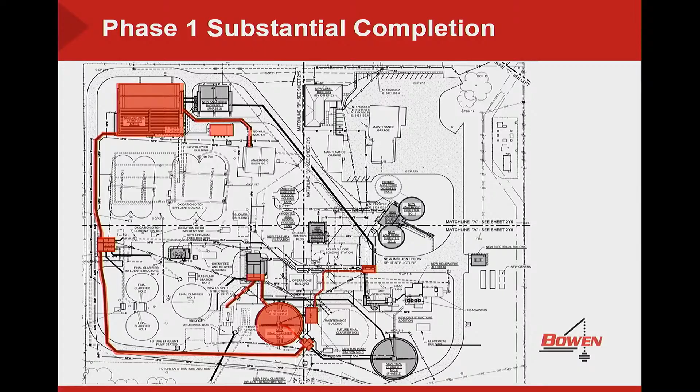So working at an extremely fast pace - started construction before design was complete, started procurement before design was complete. Just a tremendous amount of upfront effort and collaboration, especially from Wessler, to help focus on the critical pieces of the design, and then Lebanon Utilities to help tremendously to navigate their process and figure out how we could accomplish this in the time that we have.

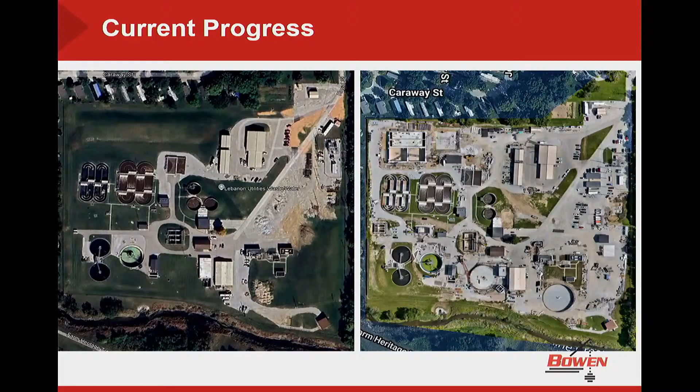This is just another view of the site. You can see how much is going on there and how much activity. Amongst all of that, Tony and his team still have to operate that plant and treat water. So we're really appreciative of the accommodation from him and his team, and then Ryan and his folks to help us. And we also appreciate you, the way you've been coordinating with our staff to keep the plant running while you're doing the building.

So it goes both ways - appreciate that. And two, we're doing this project amongst a lot of residents that live close by, so Ryan and Spencer have been pivotal in ensuring that we don't impact them negatively. So it's really been collaborative.

So we've got, bear with me, I'm going to switch to...

I just wanted to mention, I was out there, Tony took me around last week, driving around in the trucks. I've got the bad leg right now, and I was very impressed at how clean the site is with so much going on. There were probably 83 guys on site that day, and that's a lot of people for that site, and Tony's happy. Appreciate the job you guys are doing. It's important to keep Tony happy, you know.

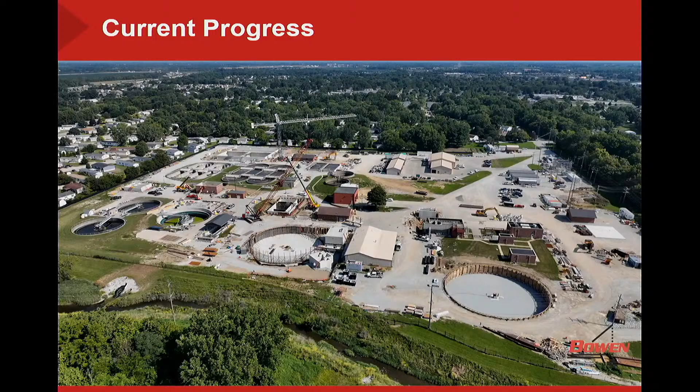So I'm going to pull up our... and for the public, we're talking about Tony Green. He's our wastewater plant manager. And as long as we're getting stuff done, he's happy. He's been real accommodating for the amount of work we're putting in place and not interrupting his day to day. He's been awesome.

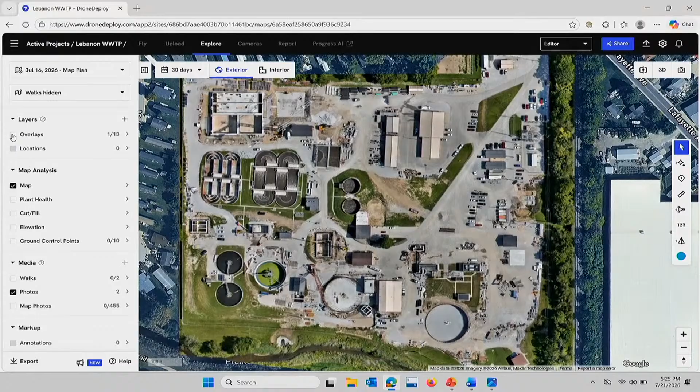I've definitely made an impact. So here's our drone map, and this really helps show progress. This is Wessler's site plan overlaid on our drone imagery, so you can get a feel for all the components of the project that have been started, and where we are progress-wise.

Our goal going into this was obviously to meet our dates for phase one, which is challenge number one, and then to expedite completion of phase two and the rest of the project and bring those dates up. There are a total of 17 new structures on this site as part of the project, and by the end of August we will have started or completed all but two. By the end of August, all concrete work will be complete for phase one, and about 60% of the process piping. So from September, October, November, we'll be focused on process equipment installation, completing the process piping, and then electrical and I&C, and then start up in December.

Let's see, some statistics. Everybody enjoys some statistics on work completed to date. This'll give you an idea of the amount of traffic in and out of this plant that Ryan and his team and Lebanon Utilities have had to accommodate, which we appreciate. So to date, we've worked over 60,000 man hours.

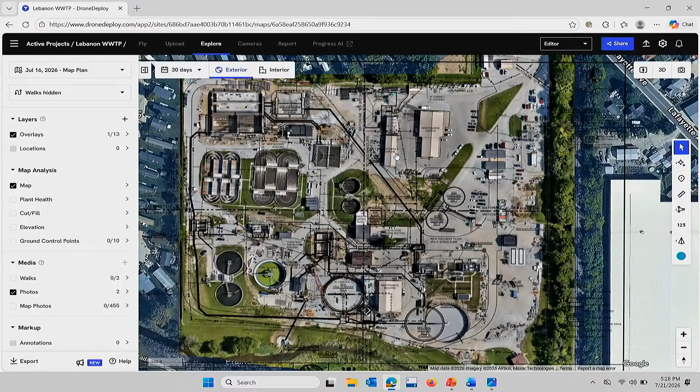Questions for us? One comment I'd make is probably a month ago, with IWE I believe, we had a meeting out there with basically younger engineers who are learning. I think this is quite a display for folks early in their engineering careers to come onto our site and see what was going on. In the midst of all the chaos out there with all the trucks coming in and out, Bowen hosted these folks, probably 30 or 40 of them, worked through similar pictures and scenes from what we just saw, and then hosted everyone for a plant tour and walked them around the construction. So in the midst of all that, they're still making time to help their profession and show some neat work going on in the field of wastewater treatment.

Thank you guys so much. Thank you, guys. Thank you.

Spencer sets up, these guys are kind of underselling how good a job they've done. Not to take anything away from Tony and his group, but we also operate our water wastewater administration out of that site. Our water distribution department and sewer collections department all operate there. It's got one gate, one entrance, and you heard the amount of trucks going in and out, and that doesn't include what we have on a daily basis. Other than a little dust, you wouldn't know it's a construction site as far as day-to-day operations go. They've had minimal to zero impact on our operations, and help us whenever we need it. So I can't thank Bowen enough for their efforts on this project.

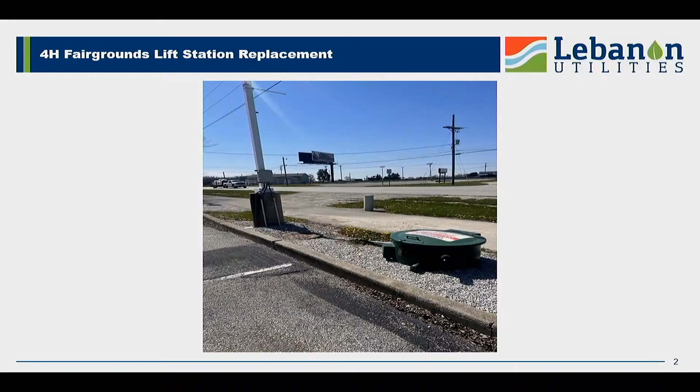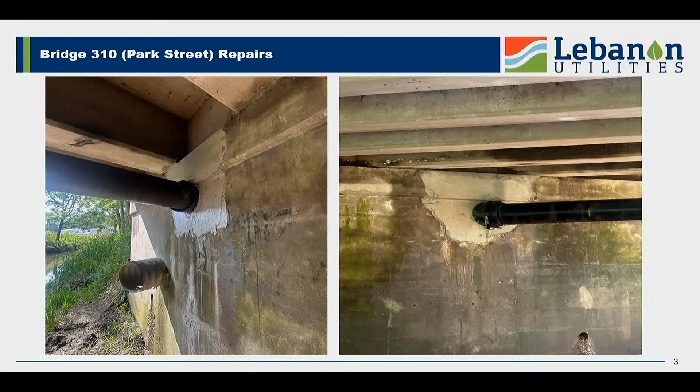Next, we had a joint operation with the county, Boone County and Bowen. Bowen helped us get a bridge repair made to the Park Street Bridge, which is bridge number 310 in the county's rule book, and this project is completed. It took about a month and a half to two months to complete. They basically went in and undermined the water main, supported it, got some rebar in, and cleaned up the area because we had some sinkholes along the road creating unsafe conditions. Bowen was able to come in and do a great job, another one of their teams getting this knocked out for us. It was an in-and-out operation with no complaints from neighbors, even with the bridge closed down for a couple weeks. This was a really good win for us as well.

Is this a civil project or part of the plant expansion? Yeah, this is part of that expansion, and it is underway. You can drive by — we've got a fence up right at the sidewalk, on the other side of the sidewalk, so the sidewalk is still accessible. You can drive by anytime and take a look; it's pretty interesting to watch them get everything leveled and prepped up.

Along with this, there's some additional work with BF&S and Thieneman. They're working on the bulk water station, and we're working on prices to get that installed in 2026. We've also got additional items like the backwash holding tank and well house replacement scope, which will occur in 2027.

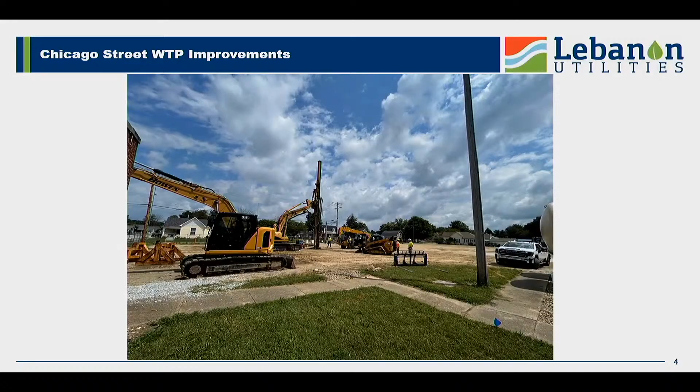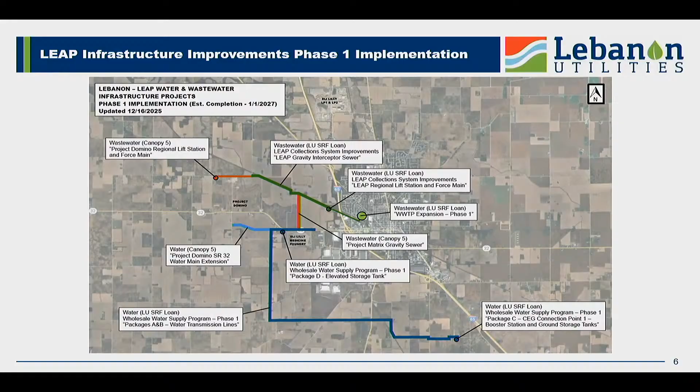So from that, we'll move along into our LEAP infrastructure. You've seen this map probably 1,000 times, but I want to give you the lay of the land. For those online and who see the video down the road, this is the wholesale water tagged in with some Canopy 5 and some other projects around town, as well as wastewater and water. So this is a good starting point if you need to get the lay of the land.

We'll start with the wholesale phase 1. Kokosing is doing this project, package A and B, which is the water main transmission lines. You can see here we've done a good job of working with Kokosing to put together a percentage complete chart. So you've got the overall water main that's installed, the percentage complete and left, and then you've got the testing in progress, and then disinfection as well. I'd be happy to share any of this with any of you guys after this. So, and then you're on schedule, right?

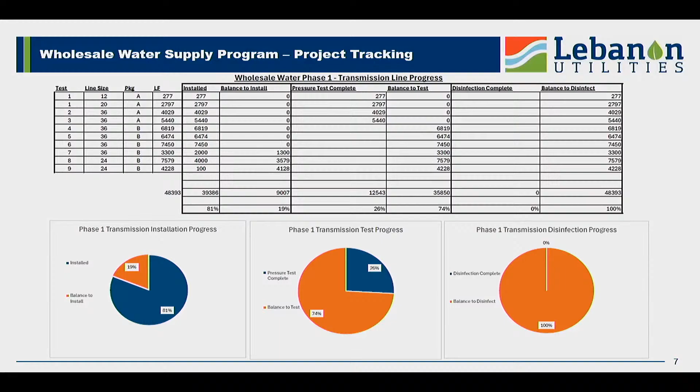Yes, sir. So we'll move on from the water line to package C, which is the booster station. We've got ground storage tank panels going up, being precast on site. We have started the foundation work for the booster station, and that booster station is the EFI building. That should be on site September, I believe. We've got a site visit scheduled for EFI. They build this thing in their warehouse and yard in Illinois, and we will go see that at the end of this month, early next month. Excited to see that and get that moving and get that on site. The target completion for the booster station is scheduled for early December, to have that completely tested and erected and everything.

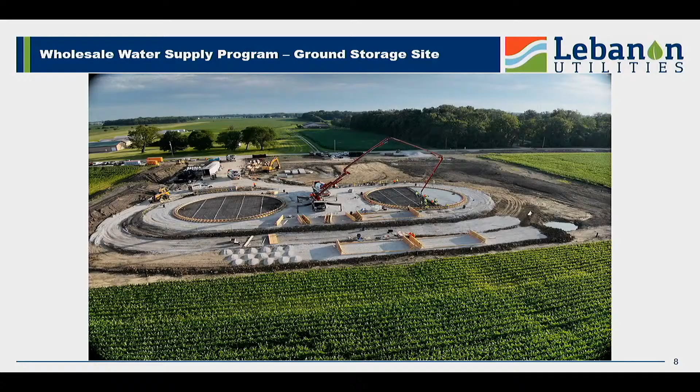Move into package D, the elevated storage tank. The interior pedestal is finished and the floor is being completed. The tank hoist date is targeted for July 27th. The tank lid and floor are being installed through August and September, with final coating on the interior finishing in October.

Would that lift take place in one day? I don't believe so. I think this will be a couple day process, or will it be completed in one? Yeah, it's a couple day process. It's a couple day process to get it set up, and then the lift itself is kind of a reverse New Year's Eve ball, I guess you could say, but very slow. It'll happen all in one day, but it's over the course of hours that they lift it up. But there'll be prep work all this week. They're already on site starting that to get ready to slowly raise it up and get it into place on Monday.

Yeah, but you're going to let us know, we can go out there and watch. It could be kind of cool. Yes, so again, it won't be that exciting, we say kind of the reverse New Year's Eve. It's a slow moving process, but we will have time lapse cameras out there, able to share afterwards so we can speed it up and make it look a little more exciting. We're hoping for boring, and then it all goes up and in place. For boring, I like that. We will extend an invite to you guys, as well as some other members of the community, to come out and check that out. That'll be a pretty fun thing to watch. That is all I have on that.

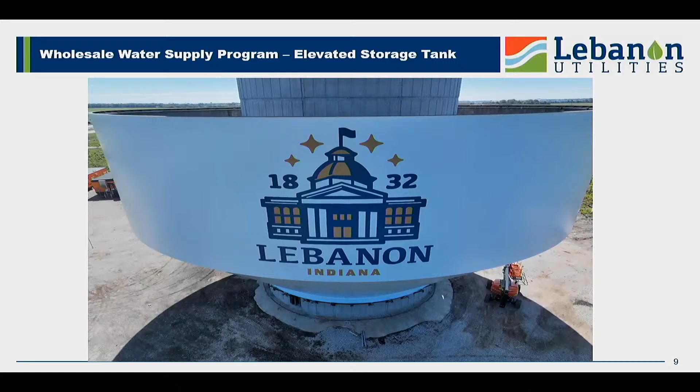We'll move on to the gravity sewer line portion of this project. All 48-inch ductile iron gravity sewer main has been installed, roughly 4,800 feet of pipe laid more than 20 feet deep. 15 manholes were installed on the 48-inch diameter gravity sewer line. These manholes are 9 feet in diameter and in excess of 20 feet in depth. So a lot of excavation on this portion of the project.

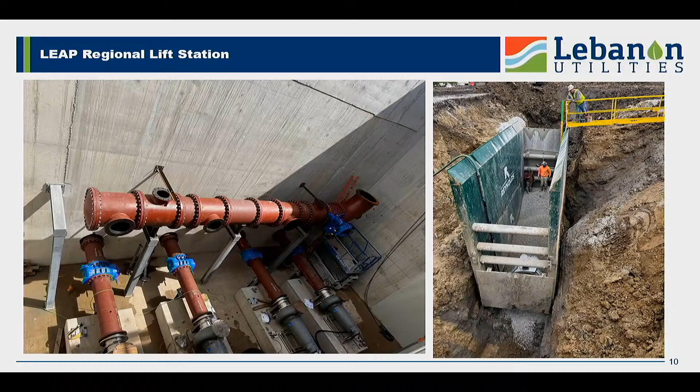Reynolds did an amazing job, really kind of flew through this. Little to no dewatering was needed in this process, which helped us crush that schedule, and they did a great job.

And there is another section of this project, which is the water line. That has completed the installation of 3,700 feet of 12-inch water line from Sam Ralston Parkway under I-65 and Sanitary Creek to the new lift station site. And that is complete.

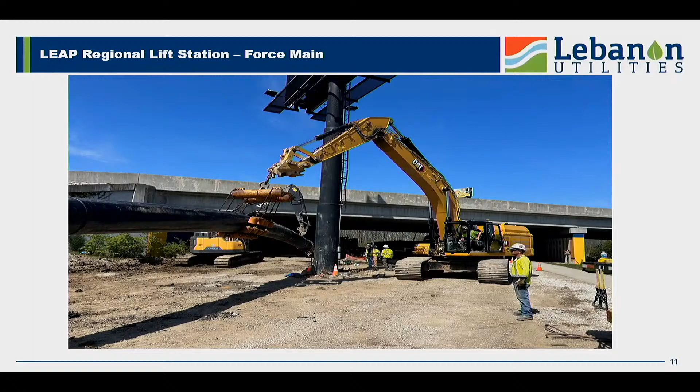So I do have a couple others that I don't have images of, but just wanted to do kind of a quick update on.

That would be the Grant Street water main replacement. We partnered with the city and Midwest Paving, who's been a great partner in relocating our water main along Grant Street, kind of north of Casey's, going north from Indianapolis Avenue up to Washington, is currently shut down. They've been a great team to work with in getting that water line relocated. So wanted to point that out, that they've been great to work with, and that project is still underway. I believe they're up to East Street.

But everything's moving along great. We've had little to no issues with them. They've been great to work with.

The next one would be Edwards Drive lift station. This is in design phases. If the board remembers, we brought that, I believe, to the last meeting to get the design approval. And so that project is moving forward, and that will take place, I believe, in 2027 and beyond.

And then our next one is one of our projects that we're pretty proud of, which is the sanitary sewer lining BOT. We've kind of hit a little bit of a stall there, but we're in a planning phase to where we've got a little bit of money left for this year if we can squeeze it in. But Inliner and the LU team are working closely to come up with some potential manholes that might need rehabbed between now and the end of the year.

And we're doing a pretty good job of setting ourselves up for great success going into the next year as a part of this BOT program with the amount of planning that we put into this.